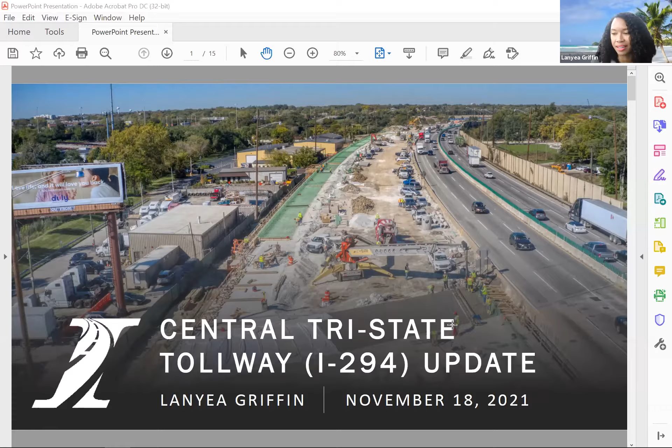A little bit more info about the Central Tri-State project. Budgeted at $4 billion, the project is the largest undertaken by the Tollway to date. We are reconstructing and widening the existing 22-mile segment from Balmoral Avenue to 95th Street, along with integrating several major infrastructure projects and implementing the latest technology that will ultimately provide congestion relief, meet the transportation demands of today and the future, and address regional needs. Construction began in 2018, and we are on track to substantially complete this project by the end of 2026.

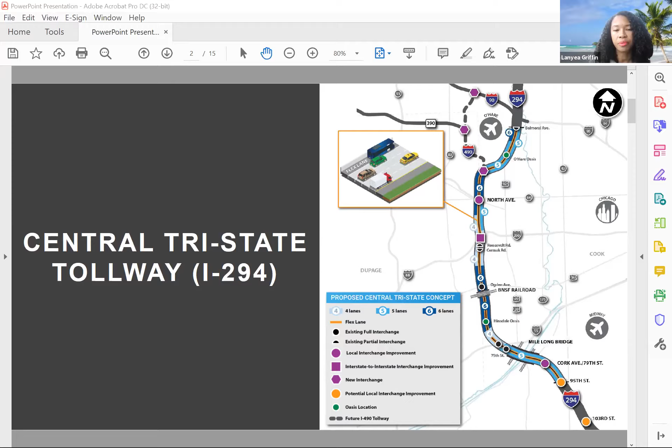When we reached the point in the Move Illinois program to begin design for the Central Tri-State, which was initially slated for a reconstruct in kind, meaning we were going to put back the exact number of lanes that were originally there, we were just going to rebuild them, the Tollway looked at the data and the lessons learned from our most recent projects, rebuilding of I-90 and delivering the new Illinois 390 Tollway, and we knew the plans needed to change.

We used traffic data to support changing it. So based on the 2040 traffic data projections, we knew rebuilding in kind would not be enough to serve our customers. With existing traffic volumes, the area already had twice the amount of congestion delays when compared to the entire system. Rather than rebuilding as is, the justification was there for reconstructing and widening where needed, reconstructing the mile-long bridge to add capacity and eliminating pinch points at the BNSF Railroad and 2 Oasis.

If the tollway decided not to widen the corridor, there would be a significant increase in travel times based on 2040 traffic volumes. The southbound side during peak morning travel, the travel time would increase by more than 150%, or an additional 36 minutes to daily commutes. On the northbound side during peak travel, the time would increase by more than 120%, or an additional 29 minutes of daily time added to commutes.

We know that we can't build ourselves out of all traffic demand, and so we also have to incorporate technology in our proposed design. The most effective way to address this congestion well into the future was to deliver a state-of-the-art roadway. So we use smart road technology, offering active traffic management and flex lane opportunities that we included on the Central Tri-State based on the successes that we've already seen on I-90 following that project's rebuilding and widening.

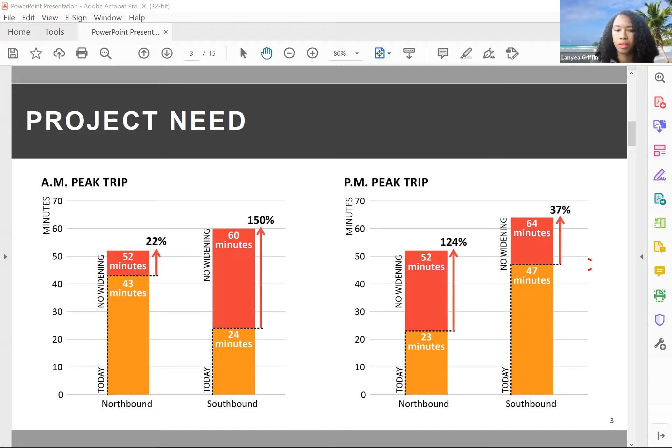So project planning, once it was decided we would do a much bigger program, we had to figure out how to actually deliver it. So we made a plan for delivery, including incorporating some lessons learned from previous projects, that we needed to be strategic about how we package the projects and contracts in order to keep work progressing and as many lanes as possible of traffic moving. With such a long corridor of 22 miles, we looked at ways to essentially shrink the corridor and put it in meaningful segments. So we took the corridor and focused on the 3 main segments for rebuilding and widening.

In our upfront planning, we also identified key projects within the overall project, including the Mile Long Bridge and the Burlington Northern Santa Fe Railway Bridge, BNSF. Starting these projects in advance of substantial mainline work allows us to utilize widened pavement and larger openings at 2 major locations along the corridor. In addition, we took into account the need to coordinate with the I-490 team to build the new I-294 interchange, along with new tollway access at North Avenue. All previous successes and challenges were evaluated and considered to optimize delivery of the CTS corridor.

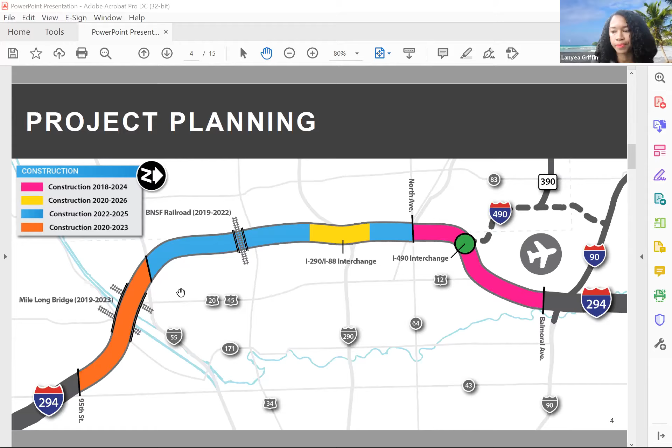Today, 4 years into the project, we have construction underway on more than 17 mainline miles of corridor.

So I would say don't drive it, but that's probably counter to what the tollway would like me to say.

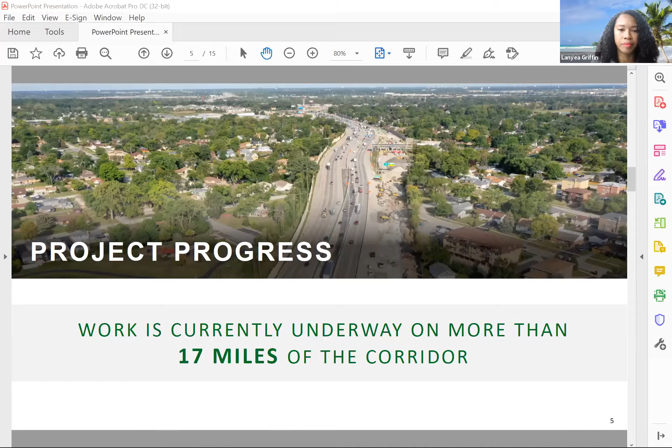Additional work throughout the corridor includes many advanced work and enabling projects as well. It's hard to believe, but we are headed to the midway point of this project, and we have made significant progress. Some of that progress includes the work I'll describe here. So while construction is visible throughout the corridor, so is our progress.

The mainline rehab and widening of the northernmost part of the project was completed in 2020 between Balmoral Avenue and the O'Hare Oasis. And so people are already taking advantage of additional, newer pavement in that segment. The new northbound Mile Long Bridge structure was completed and open to traffic in 2020, which was a significant success. Repair and rehab of local crossroad bridges, including Cermak Road, 31st Street, 47th Street, 55th, 5th Avenue Cutoff, and Willow Springs Road have been completed.

In addition, a lot less visible work had to take place to get us in a good position to be able to hit the ground running when we start construction. Some of that work included addressing utility impacts and relocations, and sewer and stormwater work, which have been critical to our success so far. Our goal was to have the utility work orders executed prior to construction advertisements to incorporate information into the bids.

The CTS team engaged in early and often interaction with the utility agencies, including ComEd, AT&T, Comcast, CenturyLink, Verizon, and Nicor. We also got a head start by prioritizing stormwater work with coordination with MWRD, Flagg Creek Water Reclamation District. Again, although we've gone through a lot, we've gotten a lot done, we still have quite a bit of work to do.

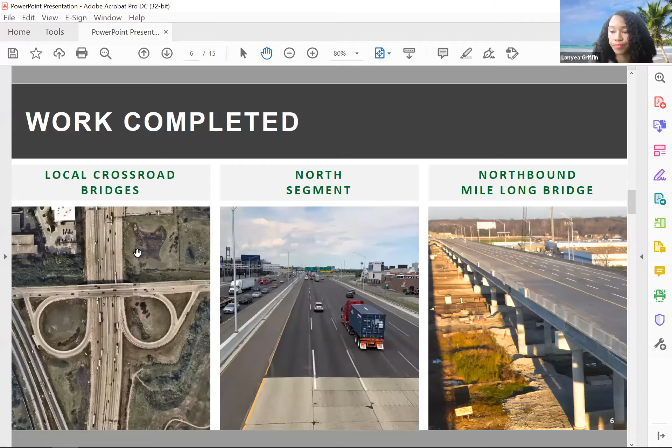So our work continues again within that 17-mile section. Anyone driving the Central Tri-State Corridor today will see the ongoing work as we approach major milestones in 2022. The Illinois Tollway is reconstructing the BNSF Railroad, which carries triple track railroad over the Tri-State between Hinsdale and Western Springs. Completion of the new shoofly bypass bridge was done in 2020, provided for uninterrupted freight and commuter rail operations

during bridge reconstruction, which is a massive thing to recognize, because just as the Central Tri-State carries so much of the tollway's traffic, this railway at BNSF carries so much traffic for BNSF and Metra. They are very similar in scope. And so we were able to keep their 3 lanes open, just like we were able to keep our 4 lanes open. So I'm forever impressed by that.

On average, approximately 104 Metra and Amtrak trains cross the bridge daily, as well as 52 daily freight trains. By the end of this year, we will be completely cut over back to the original 3 tracks with a new 4th bump out track. In 2022, we are scheduled to complete the project, which provides the new $96 million BNSF Railway Bridge as a longer, wider, 2-span steel beam structure that will allow for reconstruction and widening of the tollway underneath.

Also in 2022, the new southbound mile-long bridge structure is scheduled to open by the end of that year. The mile-long bridge carries traffic over 2 major railroads, the Des Plaines River, the Chicago Sanitary and Ship Canal, and the Illinois-Michigan Canal and local roads, as well as several major distribution centers, including UPS and the BNSF. The $500 million mile-long bridge project will deliver 2 side-by-side 4,800-foot long structures that will increase capacity from 4 to 5 lanes in both directions and accommodate what we call the flex lane.

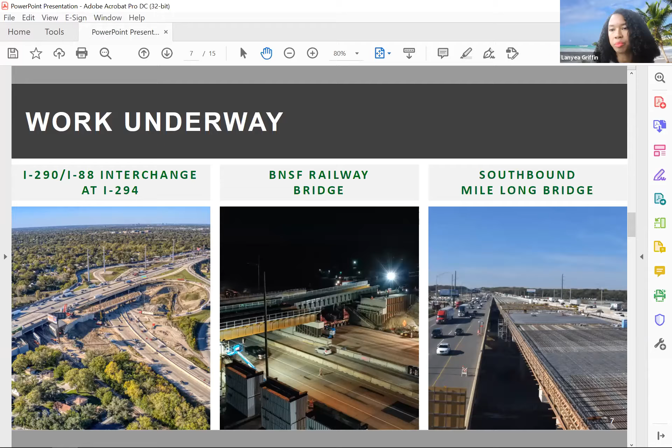So I'm going to go over some of the highlights, some of my favorite projects that I've been working on so far on this job, some of which were not envisioned even after we thought we would do a $4 billion program. So one of the biggest ones is 87th and Roberts Road, which I'll start with here. So this sincerely is one of my favorite projects, not just because Paulino's on the phone from Cook County, but it's also one of the more challenging. It's I-294 over 87th and Roberts Road, where there's an intersection crisscrossing underneath the bridge.

When originally constructed, the northbound and southbound configuration were significantly different, with 2 bridges originally on the southbound side and 1 bridge on the northbound side. A later widening of I-294 resulted in the need for a deep beam spanning both underlying roads. This was a very complex structure, with some portions of the structure actually being 2 bridges and another part of the structure being on 1 long bridge, all connected.

After much review and discussion, we made the decision to revise the concept of the bridges over 87th and Roberts and build 2 massive structures that span both the roadways in the intersection and eliminate the need for fracture critical support. The final concept is a conventional bridge with no skew that also provides for significant improvement underneath the bridge and conventional construction methods. We also were able to add a right turn from 87th Street to Roberts, which became possible because we opened the bridge up.

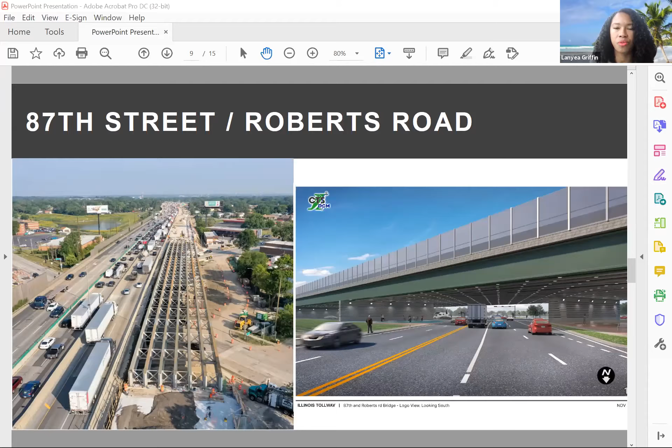There's been extensive coordination and cooperation with Hickory Hills, the Village of Justice, Bridgeview, and Cook County. While we are improving travel on I-294 and local roads below, we are also making improvements at this intersection for improved local traffic and safety. Other benefits include wider sidewalks, open space, customized aesthetics, including transparent acrylic noise abatement walls, and less maintenance. Overall, a great improvement for the tollway and the surrounding communities.

My other favorite segment here is the segment that actually carries the most traffic, and that's between I-55 and I-290. So mainline construction between North Avenue and I-55 is currently scheduled to begin in 2022 and continue through 2026. This is the blue segment from the color graphic that I showed earlier. The tollway will rebuild and widen the roadway and deliver new smart road infrastructure, as well as reconstructed shoulders, including adding the flex lanes.

As part of the existing conditions analysis, major points of recurring congestion and delay were identified at northbound I-294 near I-55 and the Hinsdale Oasis, and also between southbound I-294 and the 290 interchange. This is, again, the busiest segment of the entire corridor as it connects 3 major interchanges. The new mainline design between 55 and 290 calls for adding 2 additional lanes in each direction from I-55 to 290 for a total of 6 northbound and 6 southbound lanes.

So this graphic is slightly incorrect. We had a general graphic for the whole corridor. So the added capacity, add another lane here, because 2 lanes will be added in each direction. Significant segment. The mainline roadway improvements in this section will provide significant benefits, including adding capacity to accommodate heavy freight movement, eliminating delays for mainline through traffic, and most significantly, delivering mobility and safety improvements with dedicated lanes for merging, exiting interstate traffic, and eliminating weaving. A lot of INGs.

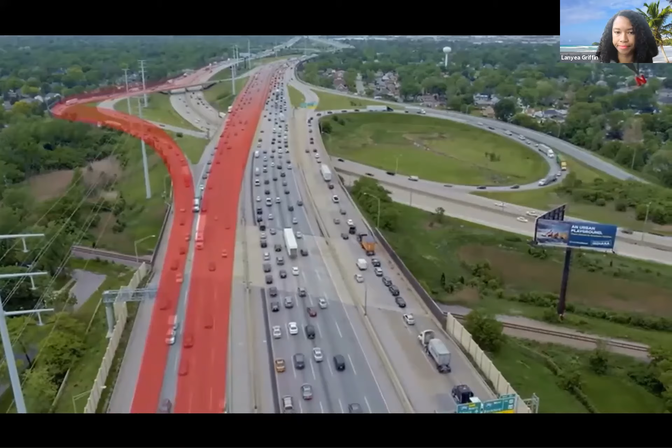City of Chicago, northeastern Illinois, and beyond. Unfortunately, this specific interchange experiences the greatest amount of congestion of the entire tollway system and delays drivers every day as they travel through this choke point, impacting travelers, businesses, and local communities. Drivers come to a near stop on some segments of the roadway, causing extensive backups and creating safety concerns. As heavy freight trucks line up to merge onto I-290 from I-294 northbound, they are forced to dramatically reduce speeds in order to handle the tight curve of the ramp. Trucks then struggle to increase speeds as they are forced up a steep incline. The interchange experiences additional issues as drivers are forced to cut across heavy traffic to merge onto I-88. Overall, the issues related to the interchange cause substantial backups in all directions, costing drivers and businesses lost time and money as motorists and commerce are stranded in traffic.

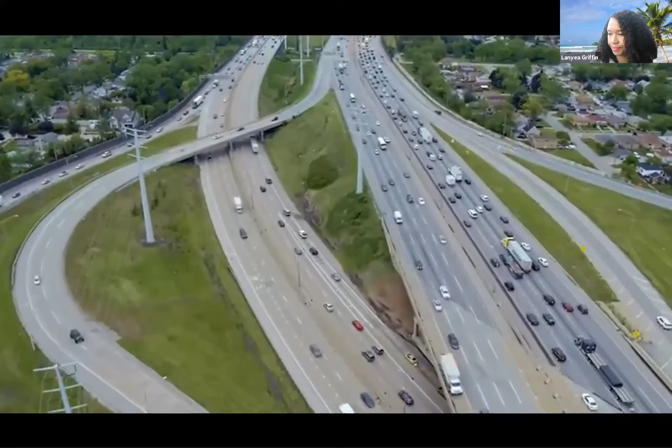Together with Illinois Department of Transportation, the Federal Highway Administration, Cook County, and DuPage County, the tollway has studied alternative solutions to improve the interchange to relieve congestion and backups. Changes will improve ramp speeds and connections. Drivers will experience improved travel speeds. Improvements will reduce merging and allow drivers to move more freely through the interchange. As a region, we will work to improve this choke point so that commuters, travelers, and commerce can more efficiently travel through the region to their destination. For more information, visit IllinoisTollway.com.

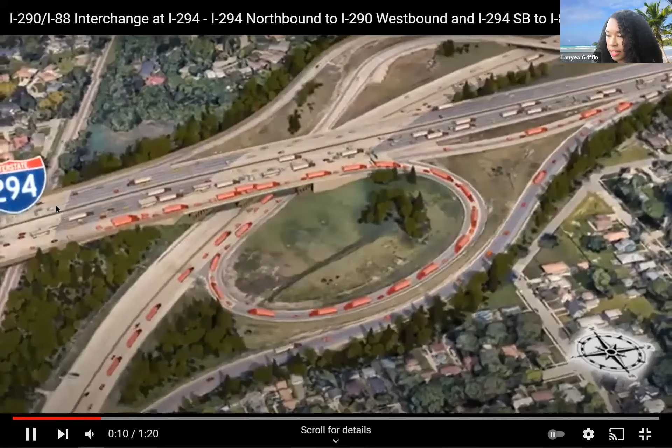All right. So that gave the overview of the entire interchange. Now I'm going to focus on a couple of movements. The first one is the northbound I-294 to westbound 290. So on this movement, I'm going to focus just on this loop ramp. What happens here is trucks get delayed, as was said in the previous video as well. They're trying to navigate this tight loop ramp and then have to overcome the steep climb to get onto I-290. And so it causes the trucks more than anybody to kind of back everything up and causes many miles of delay.

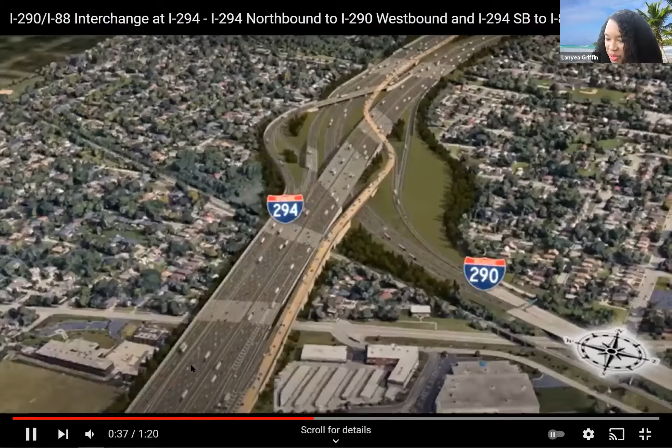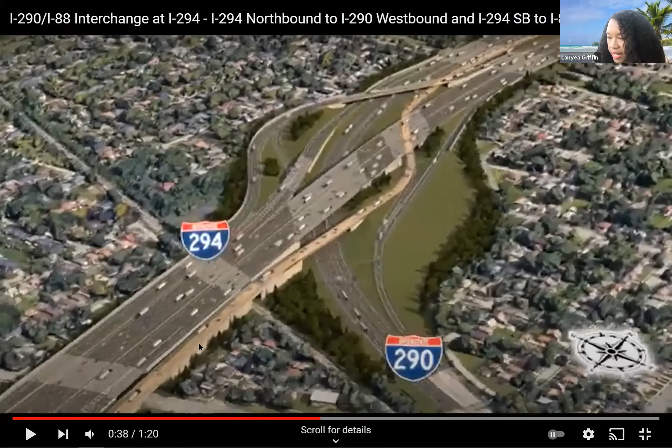Then I'm going to skip ahead a little bit to what we're planning to do to fix it. Excuse me for not looking at you, my videos to the right. So what we're doing here is building a bridge. I'll back up just a little bit. We're building a bridge over Butterfield, over the railroad, over 290, and then taking that underneath 294 to eliminate that loop and climb. They still will have to climb, but it's much more gradual to get back onto 290. Pretty impressive movement. We call it the fly under.

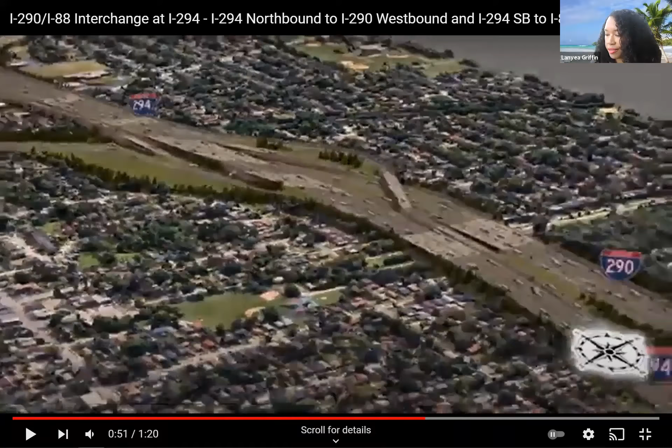The final movement I'll show is for traffic going from 290 eastbound to 88 westbound and 294 southbound. So this is just the project area showing the existing route for both ramps, both movements, I should say.

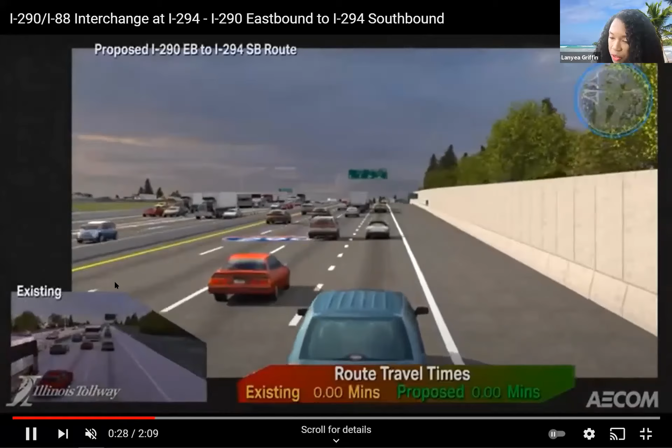It's a little difficult to see, but over on the left-hand side, you can see how the traffic pattern is today versus the big one shows what we're proposing. So you have to decide just about at Electric Avenue, southbound, to go onto 294 and 88. As opposed to existing, it was just the 88 exit ramp, and then you'd have to make a separate decision at I-294.

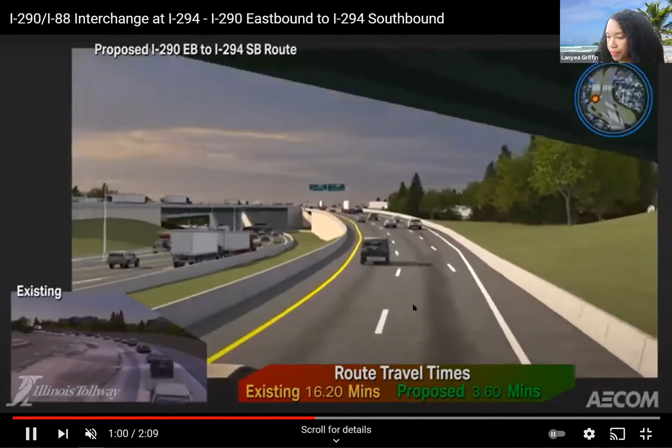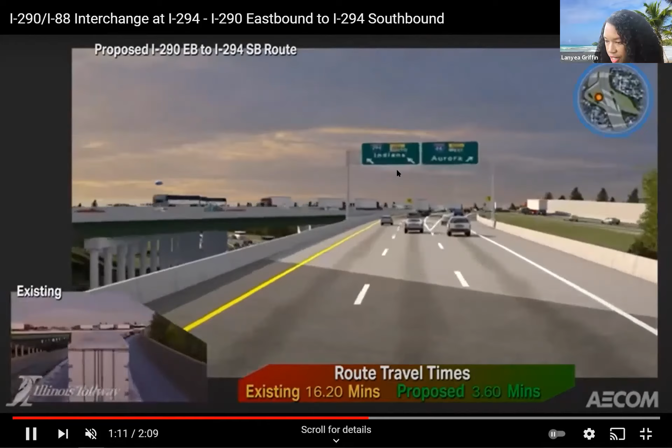And then when we get back to 294, it is still a decision point here, whether or not you're going on 294 south or 88 west. And then the 88 west ramp becomes barrier separated to keep that large queue that happens today from 290 eastbound to 88 westbound. And the traffic doesn't have to mix, which is a really sophisticated solution.

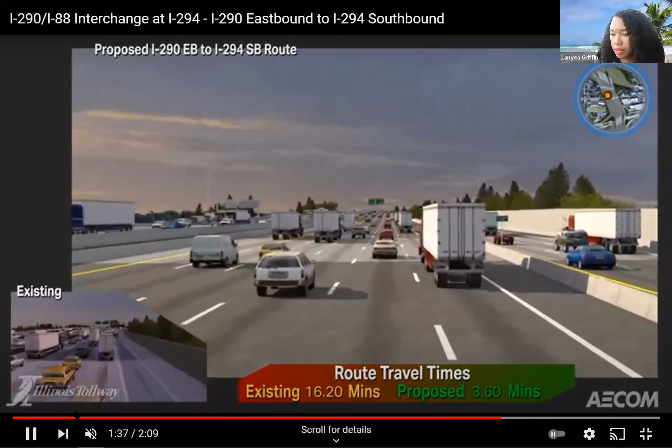So overall, we're very pleased with the design work and efforts that went into these modifications. And the proposed 88 ramp is a little under a mile, starting just south of Electric Avenue. At that decision point, again, drivers are choosing to go 294 southbound or 88 westbound, cutting out a lot of merging between 88 and 294 even.

So overall, the improvements to the interchange provide a sophisticated 21st century geometric solution to the traffic problems experienced at this interchange. The designer was able to provide the solution with minimal impacts to existing right-of-way, which is truly impressive.

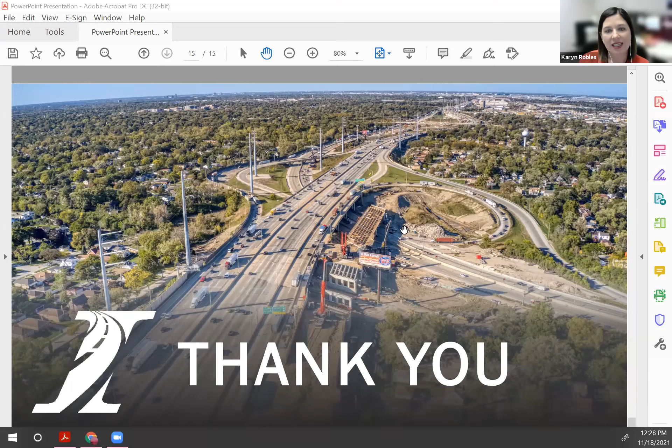The first question is, will the 290 fly under require digging under the existing 294 corridor, or does 294 sit high enough above grade to just adjust the bridge structures? I believe there's a little bit of both. I don't know the exact details, but I think they do have to do some digging.

Great. Yeah, we don't see a lot of fly unders. I know, it's interesting. I'm happy the designer thought outside the box for that. It's really a good solution. Again, especially on that quadrant, they actually reduced the amount of right-of-way that we needed. So that loop ramp now becomes detention, which is another thing that we heard from the Corridor Planning Council is extremely important to the region.

Great. Another question, did the pandemic change the timeline for any of these projects, shorten the timeline from reduced traffic volumes, or lengthen due to complications caused by the pandemic? Not currently, no. I don't think we're necessarily through the pandemic, but through the roughest part, for sure, we were able to keep work going, which was a testament to all the people that support us in-house at the Tollway, as well as all of our consultants and contracting partners. We were able to really keep things moving at a good pace.

We did take a little bit of advantage of reduced traffic, and I don't know if I'm supposed to publicly say this, but it did help us out. We had a delay on the BNSF job, and we were able to actually reduce a lane there based on the reduction in traffic. But traffic is back to just about normal on the tollway, so those days are gone, which is good.